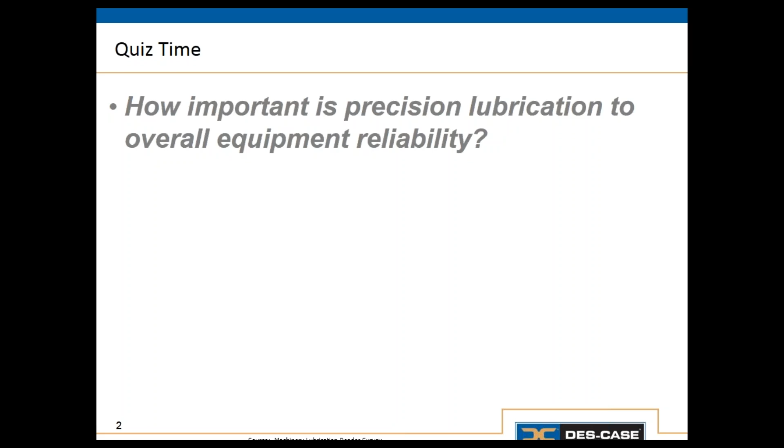So what I'd like to do first is I'd like to kind of talk through a reader survey we did back in 2011, and we reached out to the readers of Machinery Lubrication magazine and we asked them, how important is precision lubrication to overall equipment reliability? Now, I'm sure you can understand this is a lubrication trade magazine, dedicated to lubrication best practices. Everyone who receives the magazine subscribes to it, so we understood the readership has a specific interest in lubrication. So when we asked how important lubrication was to overall equipment reliability, we weren't really surprised by the results that we got back.

81% said that lubrication was critically important to overall equipment reliability. 18% felt it was important but not critical, and less than 1% felt otherwise. So really what we're talking about is just over 99% of all respondents felt precision lubrication was important or critically important to overall equipment reliability. So again, no real surprises there.

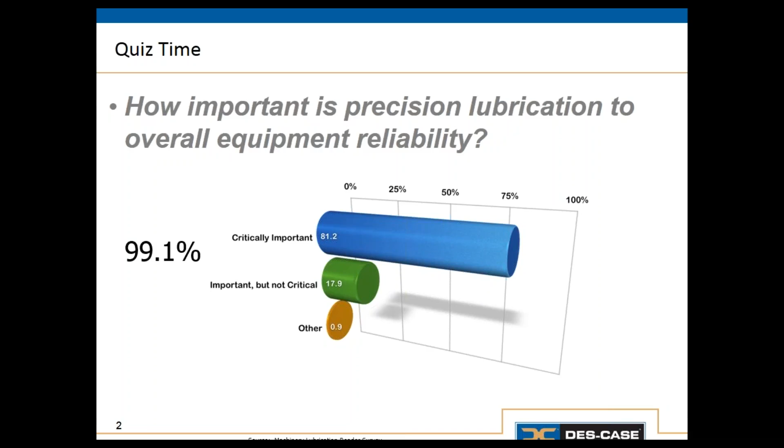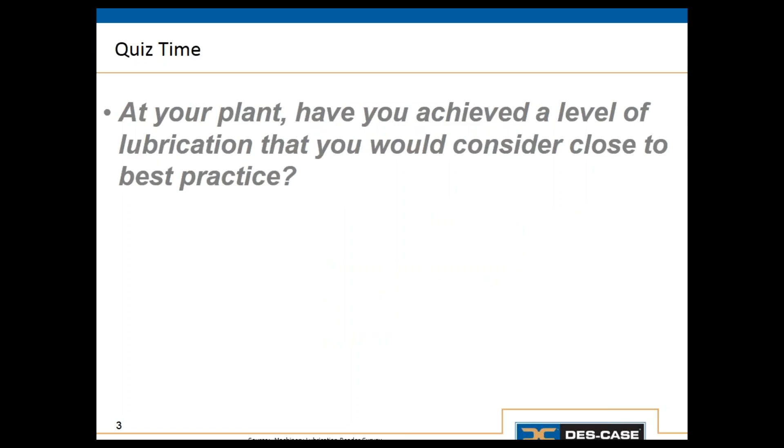So we asked a follow-up question. We felt that, well, if everyone feels it's important or critically important, then everyone must be doing something about it. So we asked, at your plant, have you achieved a level of lubrication you'd consider close to best practice? And this is where the results became a little bit surprising. What we got back was that about a third of respondents felt that they had achieved a level of lubrication close to best practice, and two-thirds had not.

99% of all respondents felt it was critically important or important, but only a third of them were doing anything about it. And I really feel like if we were to address that third of plants who felt they were doing anything close to best practice, we'd still find lots of room for improvement.

And one of the reasons for that is we tend to, in the plant environment, benchmark ourselves against a previous version of ourselves. If we've worked in a plant for 10 or 15 or 20 years, we know that, well, 5 years ago we were really bad, you should have seen us then, and now we're so much better.

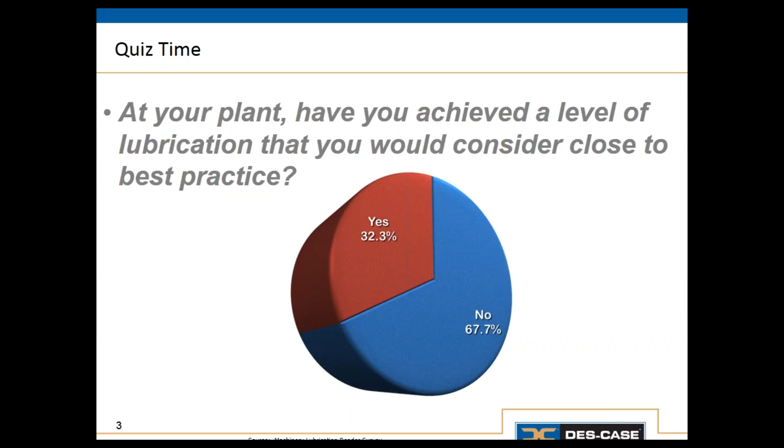And yes, you may have made some significant improvements and you're better than you were a few years ago, but relative to what industry best practice would suggest you should be at, there's still a lot of room to grow. So we took a look at these results and we really tried to understand what were the roadblocks, what was happening in these plants keeping them from moving towards best practice in lubrication. And we kind of boiled it down to 3 main roadblocks.

The first one is the one we're going to address today, and this is really the lack of knowledge or understanding of what's possible. Most people don't understand the impact of poor lubrication and contamination downstream. They feel like, well, if there's water in my oil, yeah, that's a significant problem, let's get it out. It's more of a nuisance than it is a root cause.

So we're going to talk about the lack of knowledge and understanding of what's possible. We do know that there's other roadblocks, including just being simply too busy. We've all got 50 or 60 hours worth of work to do in a 40-hour work week. We're doing more with less resources today than ever before.

And then, of course, we'll also address this afternoon, where we're talking about the lack of management buy-in to provide the funding. As maintenance personnel, reliability personnel, engineers, we talk in very technical terms. When we're trying to illustrate the challenges we have in lubrication and specifically contamination control, there's an investment that needs to be made to overcome some of these challenges.

And our job is to convey what we know about lubrication, contamination control, and reliability, and convert that to a language that management can understand. And unfortunately, as technical folks, engineers, and reliability folks, we're just not really good at that. So we'll talk a little bit about that this afternoon.

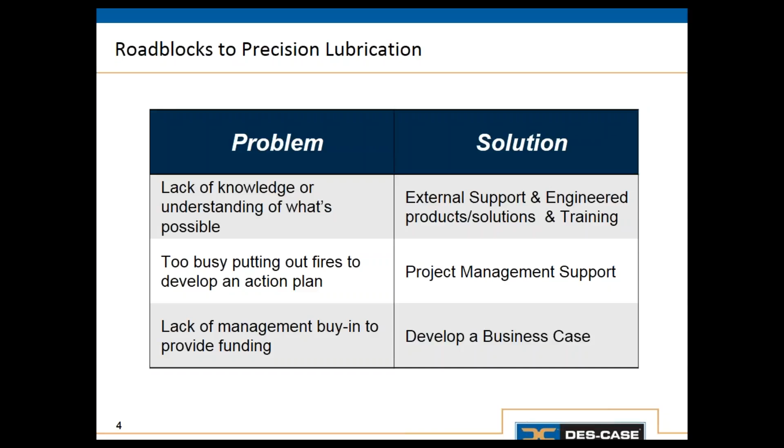But I think that's where we're going to kind of frame out the rest of the conversation, talking about the lack of knowledge or understanding of what's happening and what's possible, and then how to really convert what we know about reliability, lubrication, and contamination control into a language our management team can understand, and not just understand, but get behind it and really support it.

So let's talk a little bit about the role of lubrication and machine reliability, because I think this is really where the fundamental aspect of contamination control comes from. There was a study that ExxonMobil did many years ago at a paper mill in the United Kingdom. And one of their conclusions was that less than 0.5% of a plant's maintenance budget was spent on purchasing lubricants.

And we could all probably agree with that. Of our maintenance budgets today, we don't spend a huge percentage just buying lubricants. But they concluded that the downstream effect of poor lubrication can impact as much as 30% of a plant's total maintenance cost each year.

So putting that in perspective, ExxonMobil feels that if a plant has, say, a $10 million maintenance budget, they're losing $3 million of that every year to the downstream impact of poor lubrication.

So it's important that we look at what poor lubrication is. And it means many things to many people, but we need to kind of define that in a holistic way. It's not necessarily just the quality of the lubricant itself. It can be the quality of the lubricant, but it's many other things. It's too much lubricant, too little lubricant, the wrong lubricant, maybe the right lubricant with the wrong additives.

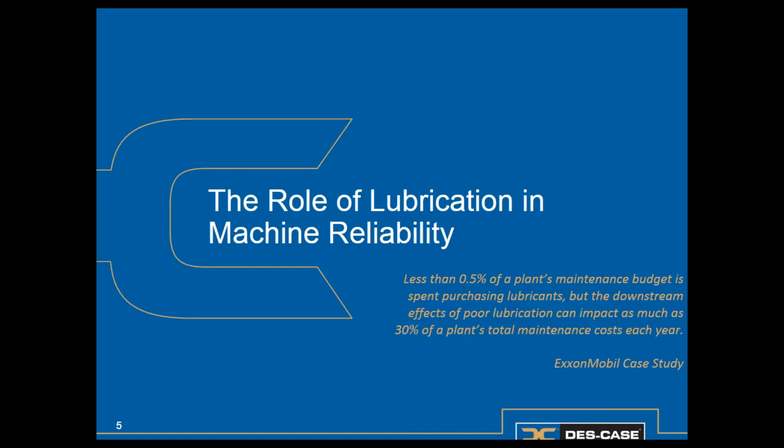So we have to understand, before we get into the downstream effect of contamination, we have to understand what causes machines to fail. And we all know that machines, as they rotate or reciprocate, that they wear. And the job of a lubricant is to separate those mating surfaces to eliminate or reduce the amount or potential amount of wear. Now, Professor Ernest Rabinowicz spent a lot of time in his career at MIT doing research on what he called the loss of usefulness.

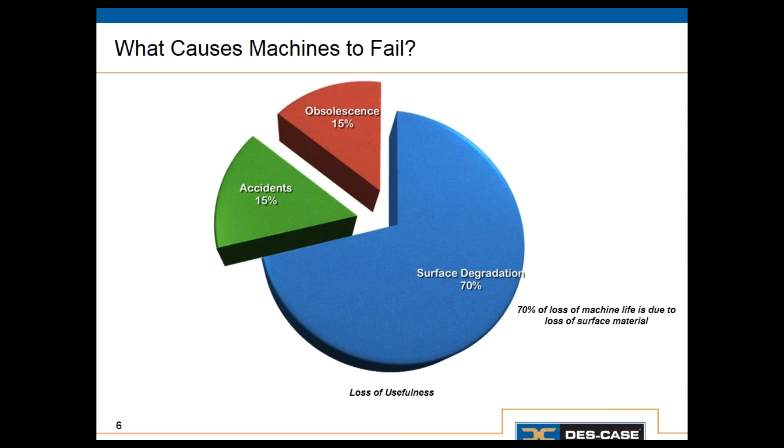Within his research, he found that about 70% of why machines fail was due to surface degradation, a fancy way of saying machines are wearing out. Of that, 70% of machines failing due to wear, 20% was due to corrosive wear, so acids and moisture in the oil corroding the internal surfaces of our components. But most of it was due to mechanical wear.

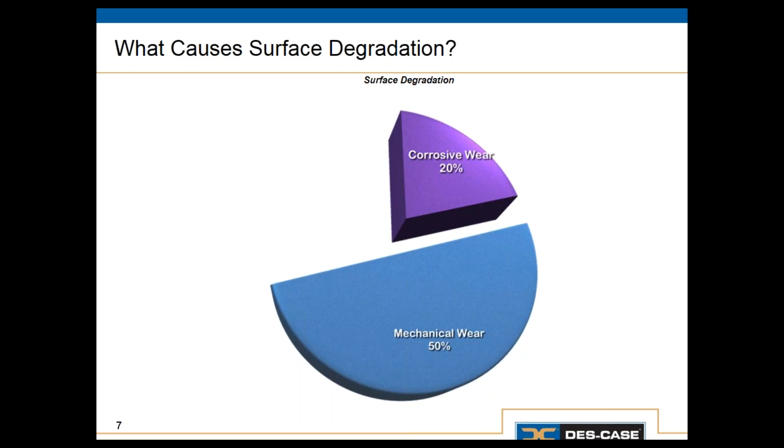When we look at the causes of machines wearing and how this mechanical wear actually occurs, we can reduce it down to a few main culprits: abrasion, erosion, and fatigue. These are wear modes directly due to particle contamination. In fact, 82% of mechanical wear is caused by particle contamination, not water, not acids or deposits, but particle contamination. So it stands to reason that we should really focus on the number one contaminant: particles.

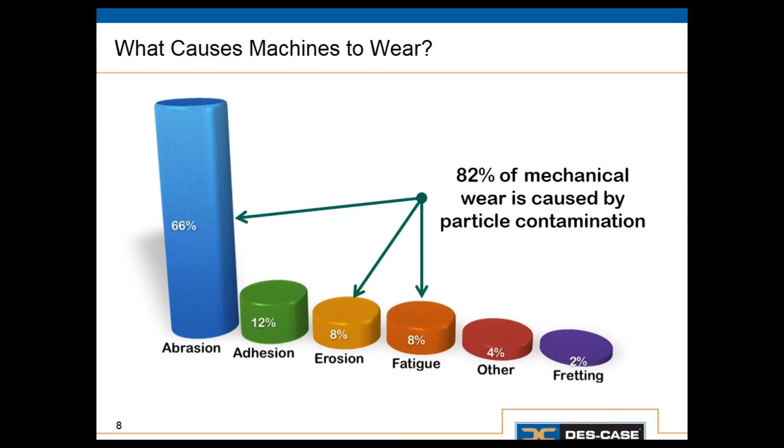Let's talk about abrasion, erosion, and fatigue. Three-body abrasion requires a third body, and that third body is a particle. What's interesting about the particles in this image is that they're almost exactly the same size as the opening they're embedding themselves into. If these particles were much larger than that clearance, they wouldn't fit inside or embed into the soft surface. If they were much smaller, they would simply float on through.

It's important to understand that clearance sizes are different for every component, and we should focus on the most critical components of our system when looking at filtration and what size of particles to filter. We're really looking at clearance size particles, generally somewhere in the neighborhood of 2 to 5 microns. So if we're targeting 10, 15, or 20 micron particles, we're not targeting the clearance size particles, the ones causing the most damage.

With three-body abrasion, we have two types: plastic flow or plastic deformation, and cutting. In plastic flow, a clearance size particle embeds itself into one of the mating surfaces, typically the softer one, and then plows against the opposing surface, creating a berm with several subsurface fatigue cracks. That berm will eventually break off, potentially going downstream and causing more problems.

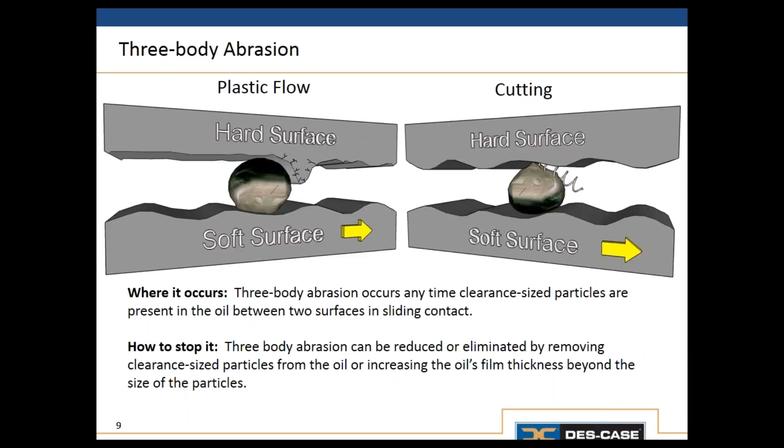With cutting wear, it's due to the shape of the third body particle. Again, it embeds itself into the soft surface, but typically has a very sharp edge, which scrapes along the opposing surface, pulling off a very distinct shape of wear debris that looks like a corkscrew. It's serrated on the edges, very sharp, and typically quite large, causing a lot of damage within our systems. The only way to stop this is to eliminate or remove the clearance size particles, or by increasing the oil film's thickness beyond the size of those particles.

Erosion wear typically occurs in high-velocity hydraulic systems. This is essentially sandblasting on the inside of a hydraulic system, where solid particles travel at high velocity, and when they meet the surface of the machine or change directions, they rub themselves against the surface, pulling material off as they strike it. Again, the way to stop this is to eliminate the particle contamination.

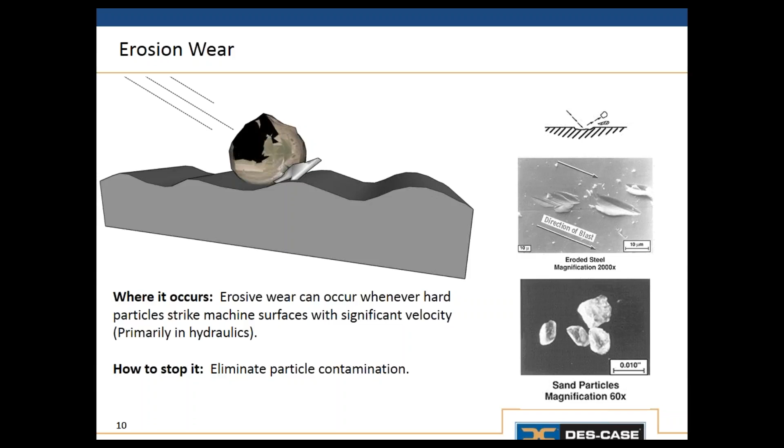And then, of course, contact fatigue. This is something we see quite often, especially in rolling element bearings. Again, a clearance-sized particle exists between the surfaces in the rolling contact bearings and generates a high amount of pressure. It's very localized, and again causes berms and subsurface fatigue cracks. Eventually those fatigue cracks make their way to the surface, resulting in significant pitting or spalling in the rolling elements. So again, the only way to eliminate this is to increase the oil film thickness or eliminate the particle contamination.

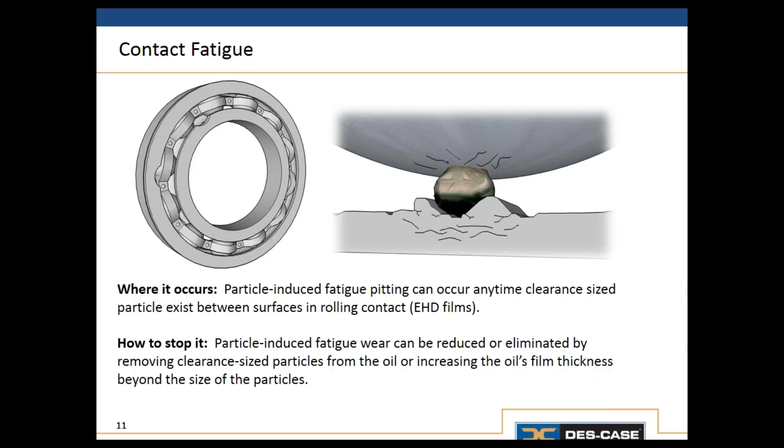So let's talk a little bit about contamination now. We're talking about solid particle contamination because we know that 82% of mechanical wear is caused by particle contamination, and this is a pretty significant finding. So if we want to reduce the amount of wear in our systems, we should probably be focused on particle contamination. But really, when we're talking about contamination, we can be talking about several things, and it's important to understand that as well.

So when we define what contamination is, it essentially is anything that doesn't belong in the oil. So we're talking about dirt and solid particles, but we're also talking about things like water. Sometimes it's a big nuisance. Other times it's actually very detrimental and dangerous to the lubricant.

Air, again, is something that could potentially just be a nuisance, but in fact it does have direct machine wear effects. It can damage the lubricant and has indirect damage downstream. We're also talking about things like wear debris. Wear debris acts as a catalyst for oxidation, which damages the lubricant and then goes on to damage our machine surface.

We also have to look at things like other lubricants. Even if we have very clean lubricant, we've pre-filtered our new oil and taken all the solid particles out, if it's the wrong lubricant, it's going to be just as dangerous and detrimental to the piece of equipment. In mobile equipment, fuel contamination, coolant contamination, if we've done system flushing or some type of cleaning or repair or rebuild or an overhaul, detergents and other chemicals can also be damaging to the lubricant and to the piece of equipment as well.

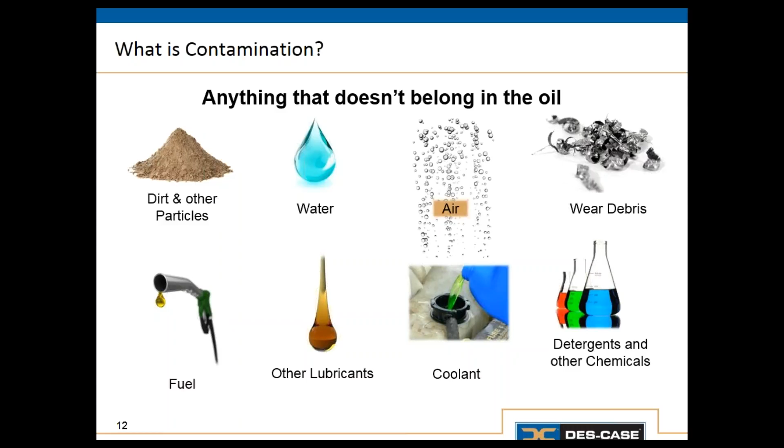So some of the common effects of contamination - we'll focus on particle contamination for this conversation because I think this is the location where we're going to have the biggest bang for our buck. If we focus on controlling particle contamination, we're going to see pretty significant results right away.

So particle contamination causes direct machine wear - we've talked about abrasion, erosion, and fatigue. In valves, we'll have something we call valve stiction or silt lock, where we have many very tiny silt particles building upon one another, causing spools and valves to lock up and not be responsive. So those are the direct machine wear mechanisms that we need to be careful of.

But we also see damage to the lubricant as well. When we have particles in the lubricant, particles oftentimes act as a catalyst to oxidation. Now, oxidation is really just the natural degradation of the lubricant. It's not something that we can stop or reverse. We can really just slow it down using lubricants with antioxidants.

But as the lubricant ages and catalysts are allowed to reside within it, things like water, solid particles, and air are all catalysts to oxidation. The oxidation then creates these acidic byproducts, deposits, varnish, this type of thing. And that has certainly damaged the lubricant and caused indirect damage to the machine downstream.

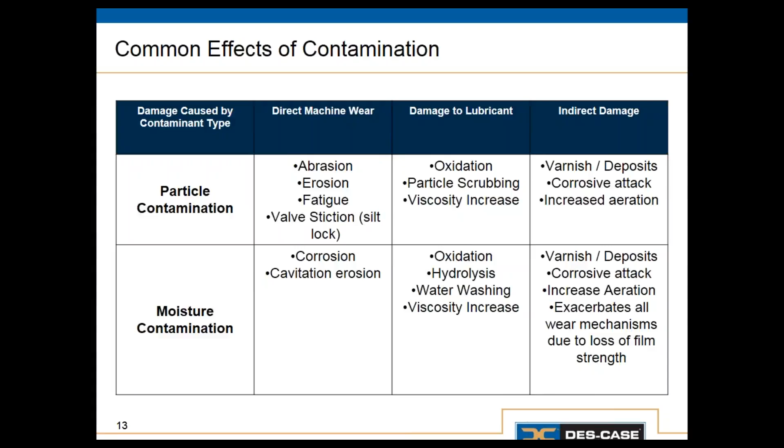Now I mentioned earlier about the particle size that we were most concerned with being the clearance size of our machines. We really want to focus on perhaps the most sensitive piece of equipment or the most sensitive component within our equipment, and those clearances are typically in the neighborhood of 2 to 5 microns. Some systems will have tighter tolerances, smaller clearances, maybe down to a micron.

Others will have much larger clearances, but for say 90 to 95% of all our equipment, we're going to be looking at a 2 to 5 micron range being the most critical clearance sizes that we want to control. So let's talk about how big a micron is.

This is very important because in the many years I've been doing this work, I talk to a lot of people who feel like the particles they're most interested in are the ones they could see. Simply by taking an oil sample and holding that bottle up to the light, a lot of people feel like they're going to be able to see particles floating by, and these are the ones they're most interested in. Unfortunately, the particles we're most interested in are much too small to see with the naked eye.

To give yourself some perspective, the diameter of human hair is about 50 to 70 microns, 60 microns on average. The particles we're most concerned with are the size of blood cells, in the 2 to 5 micron range. The extent of human vision can see a black dot on a white piece of paper - that's as good as it's going to get.

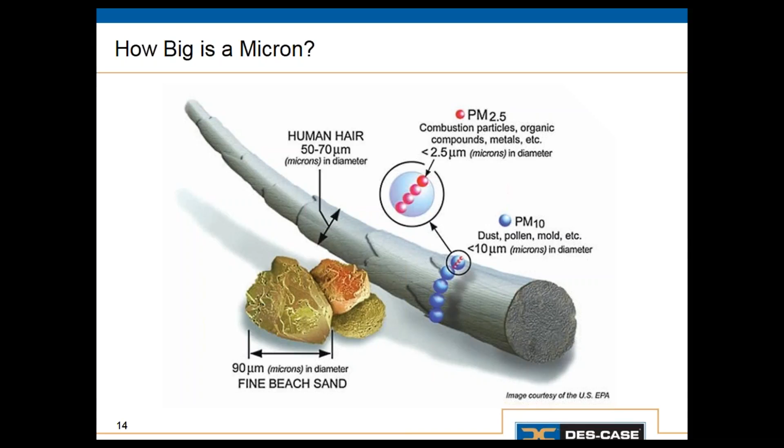But these small, microscopic particles that we can't see with the naked eye are the ones causing the most damage. So we have to look at this and say, how much does it really take to contaminate, say, a 55-gallon drum of oil? Are we talking about a shovel full of dirt? A bag full of dirt? In fact, we're talking about a lot less dirt than that.

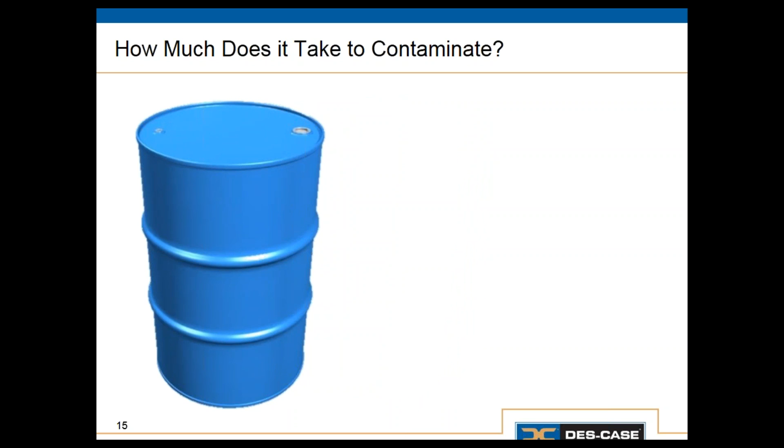When we're talking about how much it takes to contaminate a 55-gallon drum, 1 teaspoon of dirt in a 55-gallon drum is going to give us a particle count of 19, 17, 14. If you're familiar with the ISO 4406-99 particle count, the higher these numbers are, the more contamination exists in the sample. So a count of 19, 17, 14 may be clean enough for a large gearbox, but it's much too dirty for a very sensitive hydraulic system with servo or proportional valves. What that really means is there's about 1 billion particles in the drum which are 4 microns in diameter and larger - 4 microns being right in the middle of our 2 to 5 micron clearance range for particles causing the most damage.

So think about this: 1 teaspoon of dirt in a 55-gallon drum contaminates that entire drum of oil. Now think about your individual plants - how often you're opening and closing these drums of oil, how often you find a drum of new oil left open, exposed to the environment of your manufacturing facility. Think of how many teaspoons of dirt are actually in that new drum of oil. And then we simply take that new drum of oil, treat it as if it were ready to use, dispense it into our components, and we're not sure why we've got so many problems with wear and contamination. So it doesn't take a whole lot to contaminate.

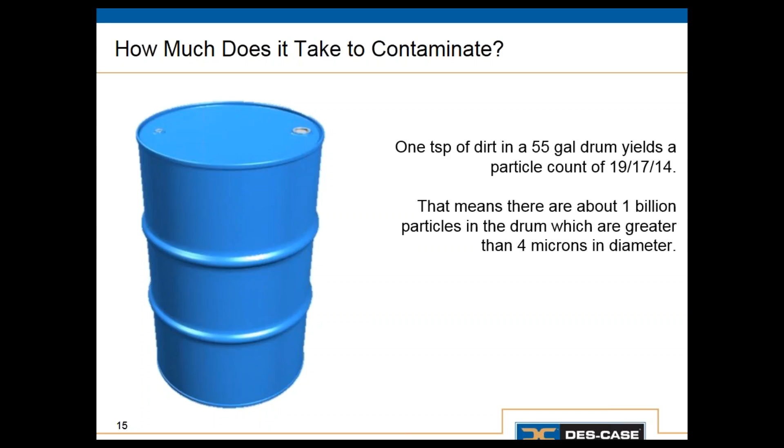The next slide is really talking about the cost of particle ingression. So what if I have a lot of dirt in my new oil - what does it really matter at the end of the day? We pulled this slide together to illustrate the cost of particle ingression. These two systems are identical in every way, just for illustration, but one system operates much cleaner than the other. They both have 65 gallon per minute pumps, they both have the same volume of hydraulic fluid. The difference is really the cleanliness of the lubricant. The system on the left is operating at an ISO 23/21/18.

So much too dirty for your standard hydraulic system. The system on the right is operating at an ISO 17/14/11, which is much closer to an ideal cleanliness for a hydraulic system. So if these systems are running 65 gallons per minute, operating 24 hours a day, every day of the year, if we were to quantify the amount of dirt, count every particle going through these pumps in a year's time at the different ISO particle counts, you're going to be really surprised at the amount of dirt that actually is.

So the system on the left, operating at an ISO 23/21/18, if we were to quantify the amount of dirt going through that pump at that ISO code, we would count 8,800 pounds of dirt going through this pump in a year's time. On the other side, operating at an ISO 17/14/11, we'd only count 55 pounds of dirt going through this pump in a year's time.

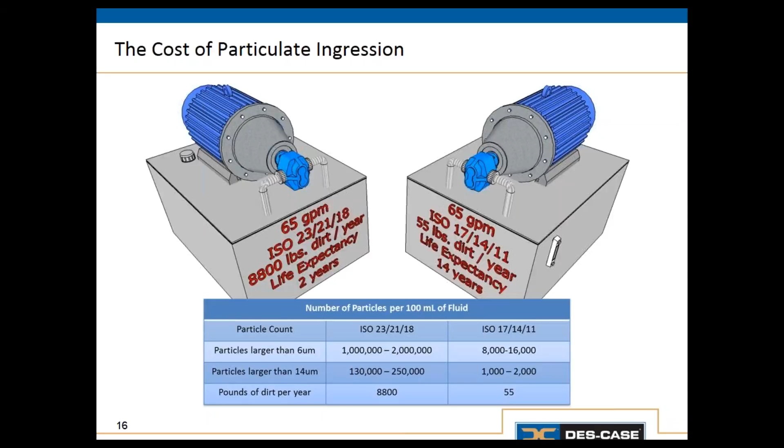So when we're talking about particle contamination, we have to really try and figure out, well, what's the best way to address this? Do we address it after it gets into the system? Do we address it before it gets into the system? Do we address it at the point we receive our new lubricants? What are we doing to really address the amount of particle contamination in our lubricant?

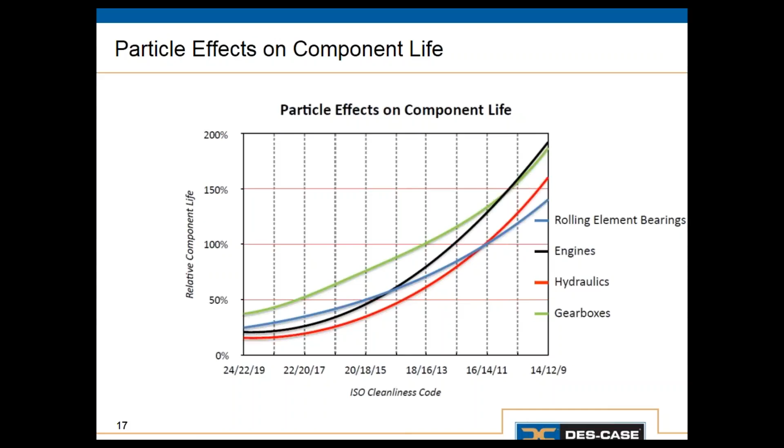But what about the new oil? What about the new oil that we're putting into our systems? Really, how dirty is the new oil, or how clean is the new oil? We have to really understand what we're talking about here. Now there's been several studies done over the past 20 years looking at new oil cleanliness, and some of the studies I've seen include every major lubricant manufacturer around the globe, looking at every type of product, whether it's hydraulic fluid, turbine oil, engine oil, looking at all different types of packaging.

So 55-gallon drums, 5-gallon pails, 300-gallon totes, bulk deliveries. And all of the research I've seen suggests that there really is no consistency from one supplier to the next, from one OEM to the next, or from one package size, or from one product to the next.

With very, very few exceptions, the new oil is not clean enough to use immediately in most applications. Now, that's not to say that you can't get new oil that's very, very clean. You certainly can. But unless we're asking for it, unless we're testing for it, unless we're paying for certified clean oil, chances are it's not what we're receiving in our warehouse.

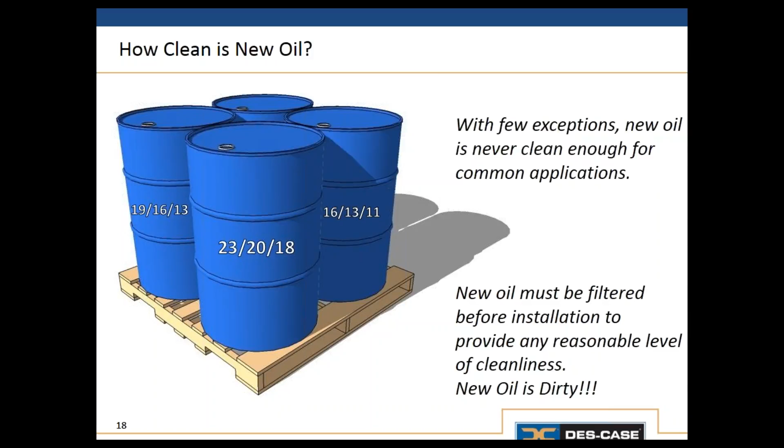So some of the other things that we do, or perhaps don't do, is we allow contaminants to enter the system. We use vent caps and breathers that aren't necessarily targeting the clearance size particles we're most interested in. We've all seen the gooseneck or the open vents, the filler breather caps on hydraulic systems, and the automotive engine oil filter used as an air filter. These typically don't target the 3 or the 2 to 5 micron particles we're most interested in.

We have to take it into our own hands to make sure that we're using a filter or a breather that's going to target the clearance size particles, and perhaps also target the moisture, depending on the environment in which our components are operating.

So we have to take a look at how the components are getting contamination in them. A lot of the times, most of the time, it comes in through the air vents. So let's make sure that we're doing everything we can to prevent them from getting in. Studies will show that it costs about 10 times more to remove particles than it does to exclude them in the first place. So let's make sure we're doing all we can to address the root causes of the particle contamination. So number 1 and number 2 root causes are particles coming in through the vent and particles coming in through new oil dispensing. And this can be challenging sometimes.

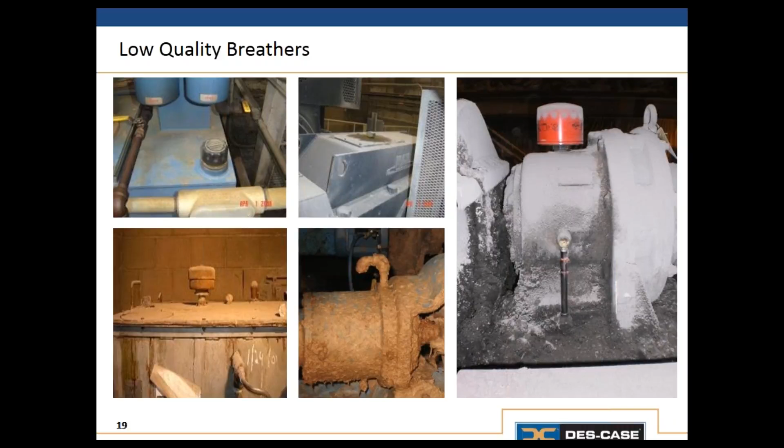When you look at a system like a gearbox, for instance, we typically have a lot of options for modifying our equipment because there's a lot of things we want to do with our equipment as far as modifications go, as far as accessorizing goes.

So first and foremost, we want to make sure we've got a proper breather on the system. Every system is going to breathe, right? So when the system breathes, we want to make sure we offer a path of least resistance, and that path of least resistance should be able to strip the incoming air of particles at the clearance size, so 2 to 5 microns, and also strip the air of any kind of moisture. Moisture is just as damaging when it gets into the component as solid particles are.

We also want to make sure we do a lot of other things. We want to make sure we've got quick couplers on our systems, quick couplers for filling. We don't want to have to fill our systems, or top off our systems, or change the oil in our systems while having the system exposed to the environment, especially the operating environment.

So we want to use quick couplers coupled with filter carts and dispensing pumps with filtration so that we can keep a closed system, right? We also want to make sure we can take an oil sample properly. We want to have a sample valve permanently installed somewhere on the machine that gives us a representative sample, a snapshot of that system that's truly representative.

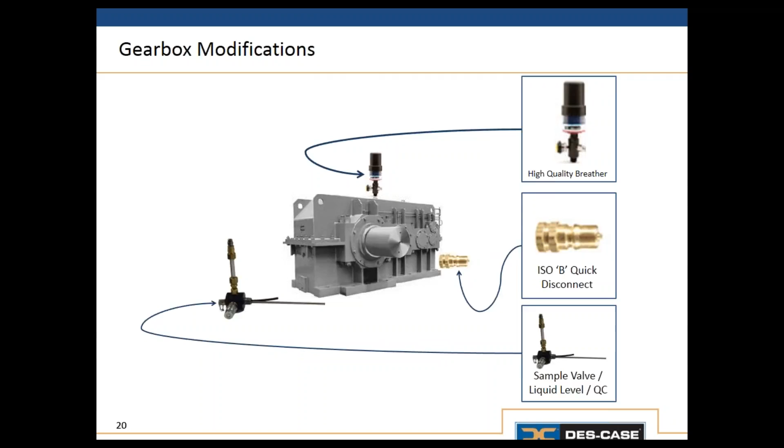And when we do have accessories installed, things like quick couplers, it makes it really easy for us to keep that system clean. So when we want to dispense oil, we use the filter cart to dispense oil into the system, so we've not opened the system to the environment. We're pushing the oil through a filter before it goes into our reservoir or sump. If we want to periodically decontaminate, we can use a filter cart on our system, circulating the oil through it with quick couplers without exposing that reservoir, the lubricant in the reservoir, to the outside environment.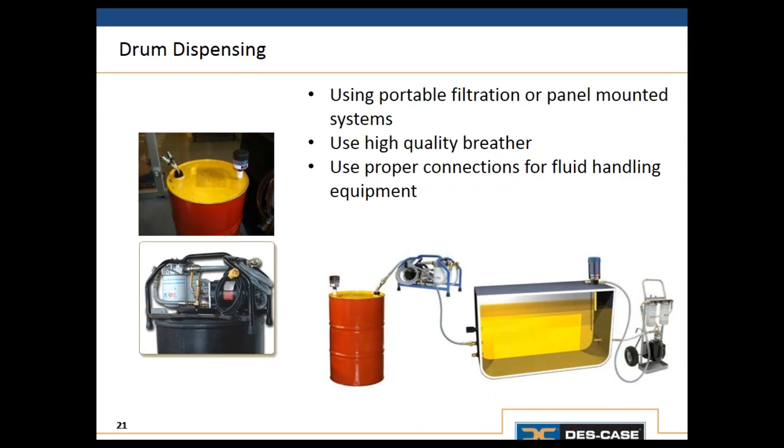And also topping up smaller systems - we want to make sure we have a method of topping off our systems that's as non-intrusive as possible. Now, I understand there's going to be some smaller conveying gearboxes and smaller pumps that we're not going to necessarily outfit like we would a very large gearbox or an agitator. But we still want to maintain as closed a loop as possible.

So, top-off containers with pumps on them, a hand pump with a quick coupler on the end of it. We've added new oil to the oil transfer container. It's been pre-filtered 2 ISO codes cleaner than the target cleanliness of the component it's intended for. And we can walk up to the smaller component, the conveying gearbox or the small centrifugal pump, perhaps that has a quick coupler on it, a very small 1/2 inch or 3/8 quick coupler. We can couple on and add oil as we need to, keeping and maintaining that closed system.

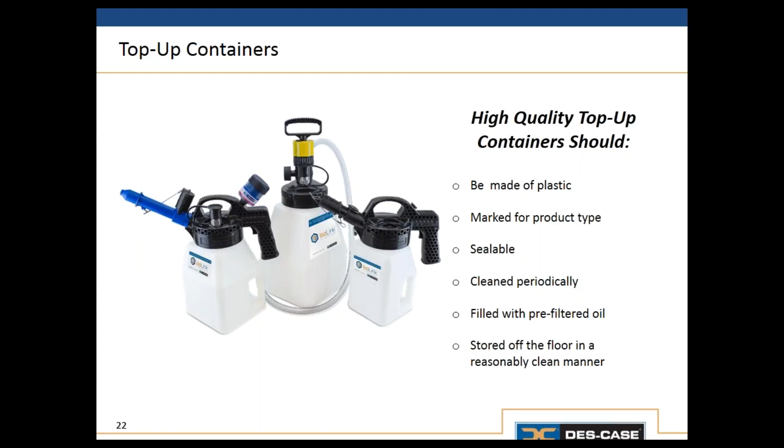So let's talk a little bit about the value in controlling contamination, what it's really worth to us down the road. We saw those 2 hydraulic systems. We know that simply operating at a very high particle concentration is going to cost us down the road. If we have to change a system every 2 years as opposed to every 14 years, there's a cost associated with that, and that cost is going to be different for every system, different for every plant. But there's a whole lot of value in controlling contamination, and it's our job to really uncover that.

We know how contamination gets into our systems, we know how we can remove it. So we've tackled contaminant exclusion and contaminant removal. But really, what's the value? Because a lot of us, even though now we know perhaps what we didn't know before - that new oil is not necessarily clean oil, and that we should pre-filter our new oil - today we might not have the means to pre-filter our new oil. We don't have a filter cart in our plant, so now our job is to convince our management team, convince the people making decisions with our budgets, that buying a filter cart or accessorizing our equipment has a lot of value downstream.

So the job for us as maintainers is to speak the language of management, right? And they speak in dollars and cents. Managers are employed to manage risk and to manage budgets. So they don't necessarily need to know or want to know about beta ratios and 3-micron particles and additives and all of these things. But they certainly want to know about something that could potentially impact the bottom line and their budget. So it's our job to convert what we know about maintenance and reliability into something that they can really understand and get behind.

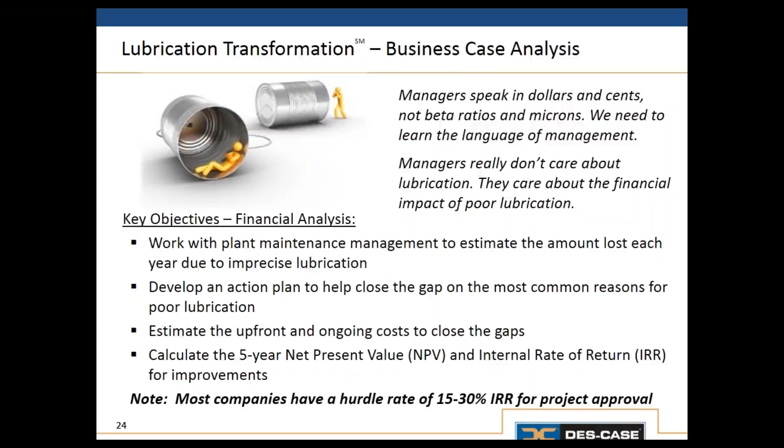So when I sit down with this cross-functional group of maintenance management, I like to ask several questions. The first question I always ask to get a real understanding of the financial impact is, what's your maintenance budget? In a typical year, what do you spend on maintenance? Most maintenance managers understand this is a number their job is to achieve. They don't want to go too much over this number, and they typically spend almost right up to it every year. But in this example, the likely case for this plant was $9 million. This plant had a $9 million maintenance budget.

Now oftentimes I'll ask a follow-up question which involves their production manager, and I'll ask them, in a typical year, how much do you lose due to unscheduled downtime or slowdowns or off-spec production? Now if there's some subjectivity built into this number, in my opinion, it's best to leave it out. If there's a very black and white number we can use in this business case analysis, then I add it in. In this example, we elected to leave it out.

So the next question then was, of your total annual maintenance cost, so of that $9 million, how much of that is spent on repair work? And as maintenance organizations, that's typically what we do, is we repair things, so this number is typically very high. In this example, the maintenance planner had perhaps the most insight into how much of the work he's planning is actually fixing things. So in this case, 80% of $9 million is being spent on fixing things.

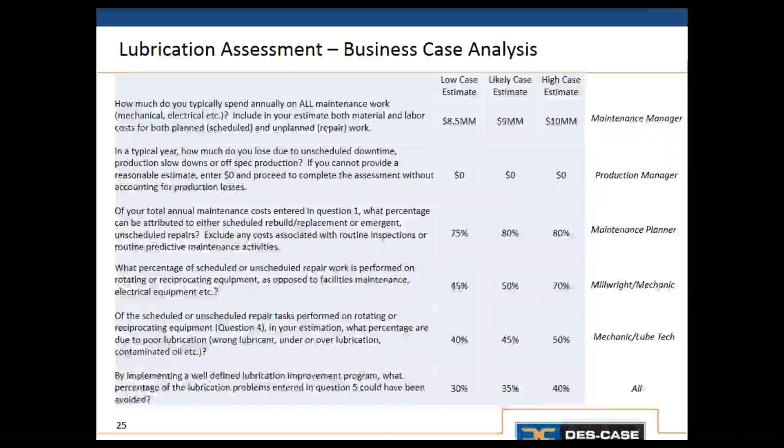So we put some financial figures against this. We've got a $9 million maintenance budget. $7.2 million was due to repair costs. $3.6 million of that was spent on lubricated equipment. $1.6 million was the percentage of lubrication-related problems.

So that number there is very important. That is the estimated annual losses due to poor lubrication. That is the total benefit we can see if we were to eliminate all of the root causes to poor lubrication.

But $567,000, or 35% of the estimated annual losses due to poor lubrication, is what the plant feels they can address. And there's a lot of reasons why that number is not 100%, why it's a third of the total lubrication losses.

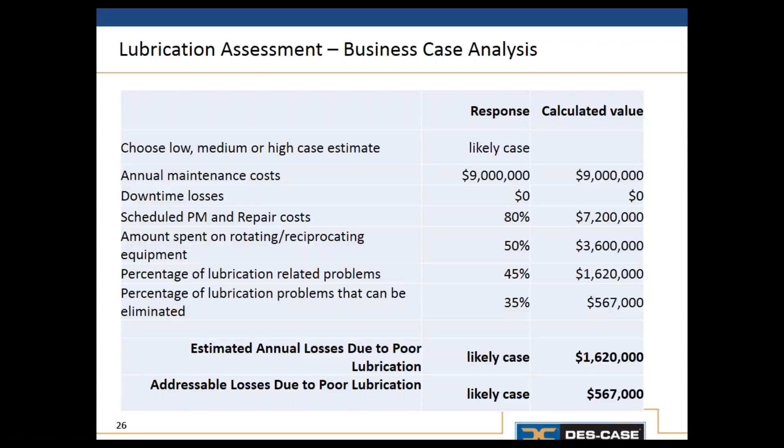A lot of times it has to do with the culture of the plant, the age of the equipment, the age of the plant, the process, the demands on their equipment. And sometimes they just don't want to shoot so high—they want to be a little more conservative when talking about what they can actually achieve.

So we take these numbers and push them into a 5-year macro business case analysis where we're looking at what the upfront and ongoing costs are.

So when we plug all those numbers in, we look at the upfront costs being about $345,000. Now this is a very liberal number—in most cases it wouldn't cost that much money, it wouldn't even cost half that amount.

But we're looking at all the costs associated with accessorizing our equipment, perhaps overhauling our lube room, getting an oil analysis program off the ground, installing sample valves, starting really from nothing. And starting from nothing in a very large plant with a $9 million maintenance budget can be very, very costly. So in this case, the example was about $345,000.

And then we looked at the ongoing costs. There's going to be costs for consumables. Perhaps we want to make sure we have a training class, a refresher class for our lube techs, millwrights, mechanics, PM mechanics every year. There's a cost associated with that.

So between the consumables, the oil analysis costs, the training costs, and so on, it looks like about $60,000 a year is going to be spent keeping this program floating.

So when we look at that, we discount it—we have to add a discount rate because the discount represents essentially the cost of carrying capital. We're going to invest in a program, and there's a cost associated with carrying that capital.

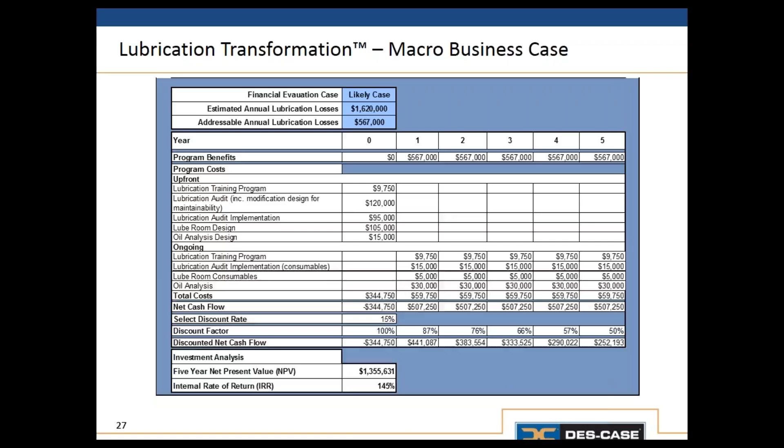So a couple of quick examples here before we wrap up in another 8 or 9 minutes. These examples were taken from a foundry that I visited several years ago, and I was doing an assessment of their lubrication program, and I asked the lube tech, take me to your critical equipment. I want to see what you're doing with your critical equipment, how you're taking care of it.

So being a foundry, it's very dusty. There's a lot of abrasive dust floating around. He said, well, we have 26 dust collectors. They're very critical to the plant. If the dust collectors go down, the people working in that area of the plant cannot work there any longer until we get it back up.

So we looked at these 26 dust collectors. Each of them had a 250 horsepower motor that was being greased every 90 days and had 2 very large 6-inch shaft fan bearings that was being greased every 2 weeks. So the current practice was 6 2/3 fluid ounces of grease per motor bearing every 90 days, and then 3 1/3 fluid ounces of grease per fan bearing every 14 days.

And I asked the gentleman, why are you visiting the fan every 14 days? Every 2 weeks you go out there and add grease to it. And his explanation, I think, was pretty good. He said, well, these are my most critical pieces of equipment, and I want to get in front of these pieces of equipment as often as possible. I want to hear them, I want to feel them, I want to make sure that they're running properly.

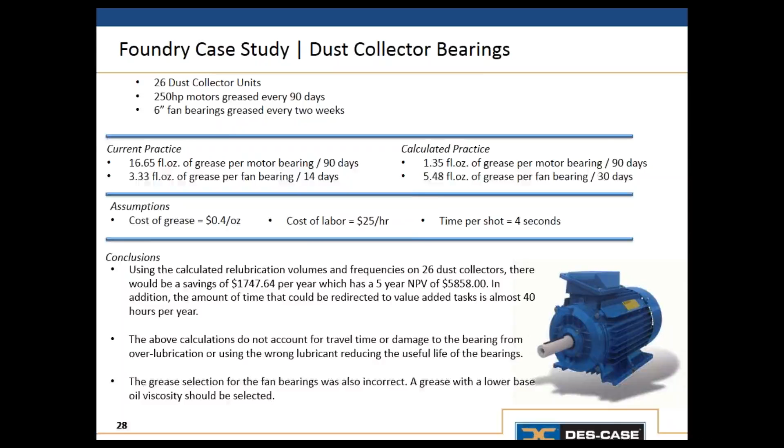So that was just one example. The other example, I said, well, I knew they were going through a lot of bearings every year and a lot of electric motors. A lot of discussion around the cost of that. So I asked them to let me know how much they're spending every year in electric motor rebuilds and purchases and bearing replacements every year.

So if we apply industry accepted statistics on electric motor failures being 50% due to bearing failures, an estimated 95% of all bearing failures being premature, and 58% of bearing failures being due to poor lubrication, we get some really staggering numbers here.

So $66,000 of electric motor purchases times the 50% that are due to bearing failures, times the 58% of those bearing failures due to poor lubrication, we come up with a number just south of $20,000 a year due to poor lubrication. We use those statistics against the almost $1.5 million in bearing failures, multiply that by the 58% of bearing failures due to poor lubrication, contamination, over or under lubrication, or wrong lube selection, and we get almost $870,000 in avoidable lubrication failures.

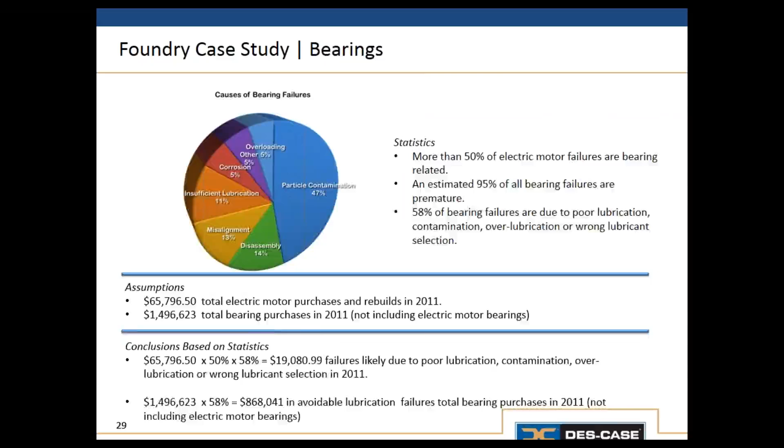So when we start to add these things up, we get a really big number here. We know that in this example, the addressable lube losses were $1.6 million. The plant themselves felt they could address about a third of those, so $567,000.

So the benefits: the first case study was the dust collectors, where we could save $1,750 per year. The second study was the electric motors, where we had about $19,000 in avoidable losses. And the third study on the bearing purchases had about $870,000 in avoidable losses.

So we add all those up. We take away the $345,000 it takes to get this program off the ground, the initial investment or upfront cost, and we take away the benefits, and we're left with about $544,000, which is really close to the addressable lube losses that this plant felt they could take on in the next year.

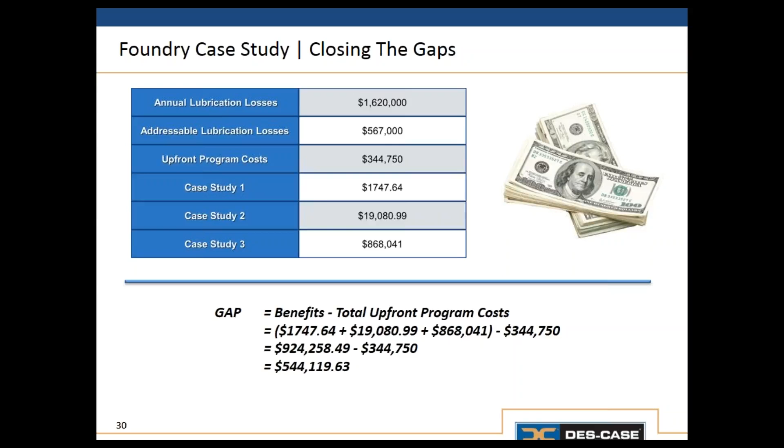You have to remember, I was walking through this plant for maybe 4 or 5 hours, and I came up with really only 3 examples. Had I been walking through the plant for a week or 2, I bet I would have found literally hundreds of examples where they could have done something a little differently and yielded very big results. So at the end of the day, a lot of the things we do or don't do are causing a huge financial impact on our plant, and there's a lot of money in avoidable losses that we can take care of.